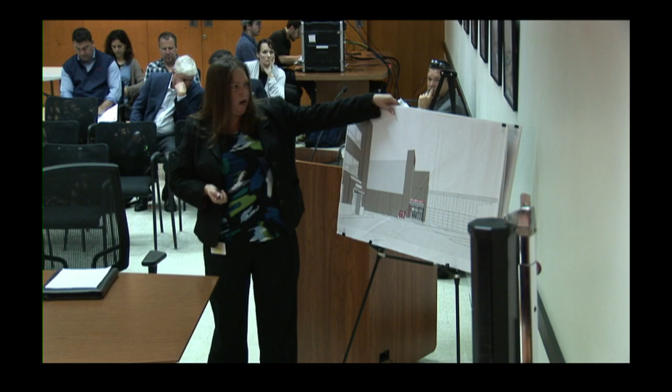Before we go to the specific repairs, just to keep the actions separate: the discontinuance is essentially 712 feet, for which the appraisal is pending. Any questions or comments on the discontinuance?

No. All right, Amy or Todd? No, we're good. All right, members of the public? All right, I'll entertain a motion on the discontinuance.

I'll make a motion to approve the petition by the trustees of Boston University, the discontinuance of any and all rights to travel the public may have had within a portion of Babcock Street, as read into the record by the chair and as shown on a set of plans entitled City of Boston Public Works Department, Engineering Division, Discontinuance Plan, Babcock Street, Brighton, one sheet dated June 2019. Second. All in favor? Aye. So moved.

Moving on to our next item, a petition by the trustees of Boston University for the making of specific repairs within the following public ways in Brighton, consisting of curb, sidewalk, and pedestrian ramp reconstruction, as well as new and relocated specialty pavement, street trees, and storm drain infrastructure. The locations are Babcock Street on its easterly side, at address number 285, between Ashford Street and Gardner Street, and Ashford Street on its northerly side west of Babcock Street, generally at number 300 Babcock Street.

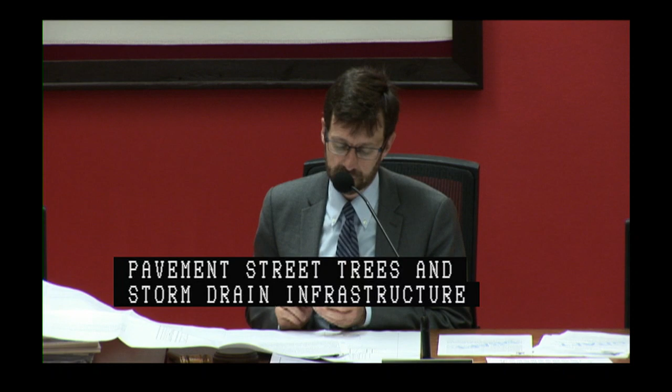This was new business on June 6, 2019, as shown on a set of plans entitled City of Boston Public Works Department, Engineering Division, Specific Repairs Plan, Ashford Street, 285 Babcock Street, Allston, Brighton, 4 sheets dated May 2019. Chelsea Christensen from Nitsch Engineering on behalf of Boston University.

The specific repairs we're proposing for Babcock Street are consistent with the improvements done across the street associated with New Balance Field. The proposed streetscape includes a 10 to 19-foot concrete sidewalk with a 1.5-foot porous strip along the back of the curb.

We are also proposing the removal of 4 existing trees, which currently land in the middle of the sidewalk, and moving 6 new trees to the back of the curb. The proposed tree pits are 4 by 6 feet. And that is the extent of the repairs.

Have you had any tree hearing on those removals? We've completed our tree hearing. Have we gotten to that approved yet? Yes, we have, and it's behind us. So it was approved, and it's been paid for, so we're set to go.

I realize you just said this, Chelsea, but that is basically moving those trees from the middle of the sidewalk, bringing them to the curb, and putting them in 4x6 tree pits. Yes, they're in the middle of the sidewalk right now because that's where the curb was. So, appreciate the change.

Did we find out anything on the construction management plan, where we are with that? It was submitted a while ago, and I hadn't heard back on comments relative to reconstruction, so I had a conversation with the contractor last Friday. It was pretty aggressive to cut off the sidewalk for the 4 months he was proposing, so we're working to tighten that up. Excellent, okay.

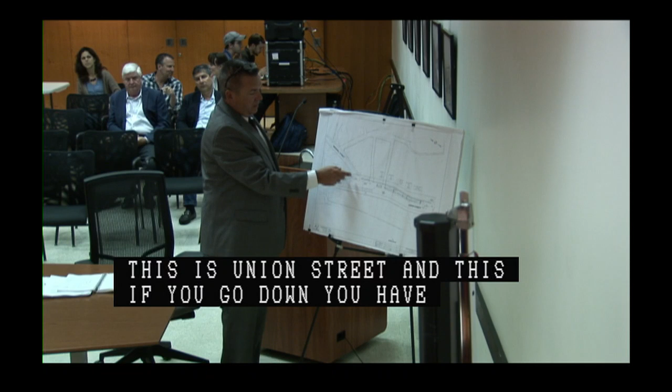But first, let me give you an overall view. This is Union Street, and the first restaurant here is One Tavern, next to the existing bank. As you go down, you've got the White Bull, Alexa, Sons of Boston, Hennessy's, and patios, and then between Marshall Street and Hanover Street, there's the Bell in Hand.

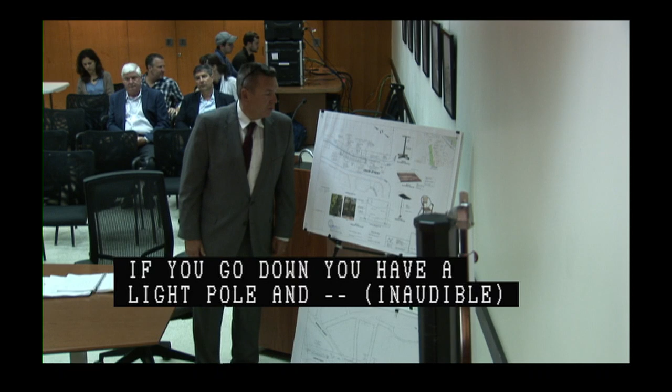The first application is for 1 Union Street. The cafe there will consist of 13 tables seating 26 people, and of that, two handicap seats are provided.

The design itself has been worked on closely with the Landmarks Commission. We're using the bollards for the back of the cafe that were installed as part of the city's recent Connect Historic Boston project. Along the front and sides, the cafe will be defined by the planters that were also part of that project, and a series of posts and chains, similar in nature to those across the street at the Holocaust Memorial. We did receive Landmarks approval.

We also met with Deputy Chief Joe McMahon about a month ago, myself and Amy Cording, and came to an agreement on safe and accessible fire egress. So we provide a minimum 20-foot clearance for emergency egress, fire, police, and other needs, as well as a 90-foot loading zone along Union Street.

There was a discussion at New Business regarding concerns with deliveries and daily operations. Since that time, the Union Street restaurant group, an unofficial name, but the proponents before you, have worked together and prepared a letter for the commission committing to working with their distributors to have deliveries before 8 a.m. I have a letter signed by each applicant, along with letters and emails from distributors promising to meet that 8 a.m. delivery time. That should ease a lot of the concerns and burdens on Union Street.

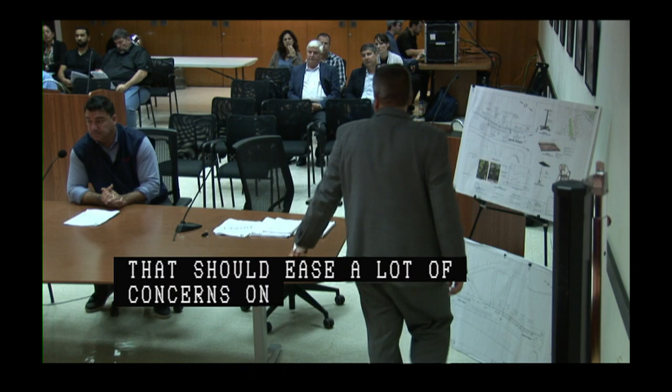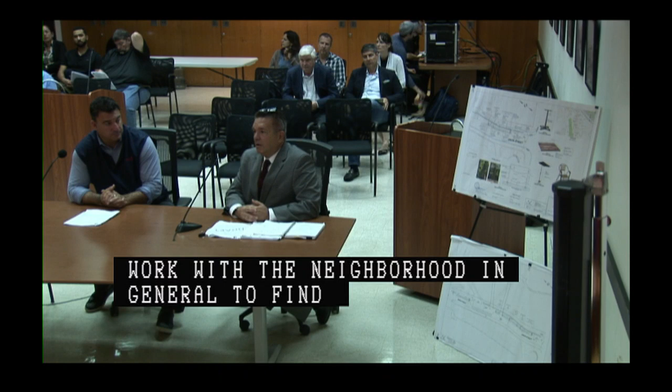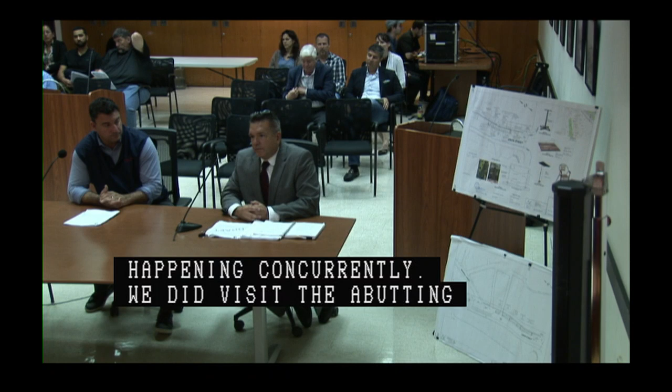In regards to accessible handicap parking, Amy Cording and I met with the Disabilities Commission earlier this week, Tuesday, on site. It's my understanding the city is going to work with the neighborhood in general to find handicap parking in this area, since not only is this project happening, but a number of other projects are happening concurrently. We visited the abutting garage on Hanover Street, parcel 7, and within that garage, at the first accessible parking level, there are 13 handicap spaces available. So there is parking available in the city, it just may not be known to the users. That's my presentation.

As you mentioned, John, there were a number of issues we discussed during new business: public safety concerns, operational concerns, accessibility issues, and serving across the right-of-way. On the public safety side, from your conversations with the fire department, this preserves an accessible path of travel.

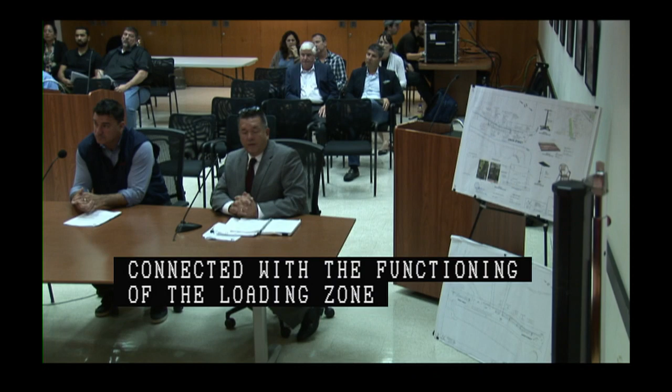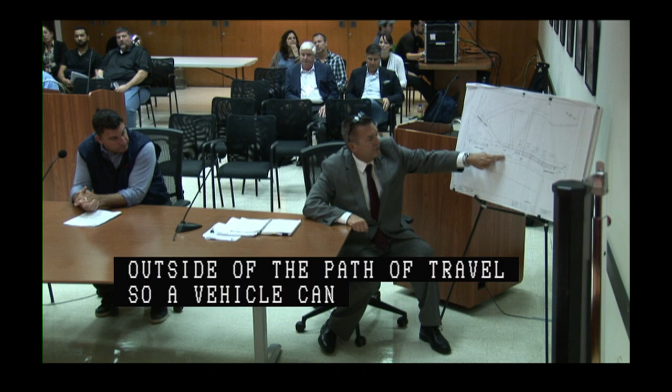Yeah, they're provided a 20-foot path of travel, which is their requirement for emergency vehicles. The loading zone is outside that path of travel. So a vehicle can come through here and out, and this is the loading zone here, about the middle of the block. We preserve the 20-foot path of travel around the loading zone, so it's not double duty as loading and fire lane.

Great. And essentially what's covered in this letter is the operations specific to each of these restaurateurs, committing that you can do all of your loading prior to 8 a.m. together within that zone. Right, so many of these restaurants share the same distributors, so there's an opportunity for them to all work together and collaborate, which will also significantly reduce the number of deliveries happening on the street today.

And there are 2 restaurants that are not part of this, is that right? Or how many? Yes, there are 2 restaurants that fall in this area here: Union Oyster House is one, and the other restaurant, Salsa.

And they were invited to join this, but they chose not to. Part of it, we want to make sure the loading can actually be confined for all restaurants within that zone to allow for the deliveries. And I'm sure my clients will welcome coordinating these deliveries with them as well.

As I stated previously, when we went through the Connect Historic Boston process, we worked extensively with the businesses here. One of the concerns was the loading. Obviously, it's not advantageous for the businesses to be receiving deliveries during working hours of operation. They want it before, so when patrons are in there, they're not getting deliveries during that time.

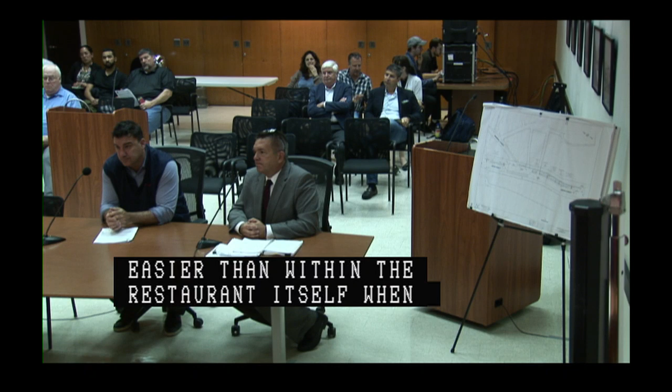Other questions or comments? No. All right, Amy or Todd? All right, members of the public?

Okay, so there are two pieces here. Obviously this, your ultimate sidewalk licenses, and Amy, correct if I'm wrong, it's contingent upon a license from the licensing board. Yeah, and that will govern the actual operations and the serving. They can have glass or plastic, that kind of stuff, will all come through the licensing board.

Great, so I think there are two things we just want to make this contingent on. Obviously, it's contingent upon the licensing board's approval. The second, I just want to take a chance to make sure that we sort of reviewed the operations plan to make sure that it actually can work for the businesses and work from a public safety perspective. Okay.

All right, I'll entertain a motion on this item, contingent again on both approval of the licensing board and our final review of the operational plan. I'll make a motion to approve the petition by Mr. Jeff Baird for the granting of sidewalk cafe license for seasonal outdoor seating within Union Street, Boston proper, as read into the record by the chair and as shown on a set of plans entitled City of Boston Public Works Department, Engineering Division Outdoor Cafe License Plan, White Bull Tavern, 1 Union Street, Boston, one sheet dated March 2019. Second. All in favor? Aye.

Moving on to our next item, a petition by Mr. Jeff Baird for the granting of a sidewalk cafe license for seasonal outdoor seating within Union Street, a public way in Boston proper, located on its easterly side at address number 15, generally north of North Street, consisting of seating for 8 persons and approximately 139 square feet within the public way. This was new business on June 6, 2019, as shown on a plan entitled City of Boston Public Works Department, Engineering Division, Outdoor Cafe License Plan, Blackstone Grill, 15 Union Street, Boston, one sheet dated March 2019.

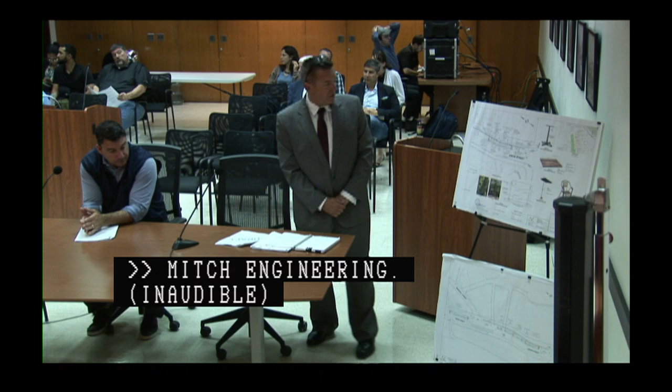Good morning, John Schmidt, Nitsch Engineering. With me is Jeff Baird, who also owns the restaurant abutting next to the White Bull. This is the Blackstone Grill. Similar cafe, similar materials, it's a little bit smaller. It's 8 seats with 1 handicap space.

And I assume everything we talked about in the previous item is... Yes, this conversation from the first petition will carry through all 6. All right, any questions or comments on the Blackstone Grill? Amy or Todd, all set? Members of the public? All right.

I'll entertain a motion on this item, again, contingent on the same two things, the licensing board's final approval and our review of the operations plan. I make a motion to approve a petition by Mr. Jeff Baird for the granting of a sidewalk cafe license for seasonal outdoor seating within Union Street, public way, Boston proper, located on its easterly side at address number 15, generally north of North Street, and consisting of seating for 8 persons and approximately 139 square feet within the public way, as shown on a plan entitled City of Boston Public Works Department, Engineering Division, Outdoor Cafe License Plan, Blackstone Grill, 15 Union Street, Boston, one sheet dated March 2019. Second. All in favor? Aye.

Moving on to our next item, a petition by Sons of Boston for the granting of a sidewalk cafe license for seasonal outdoor seating within Union Street, a public way in Boston proper, located on its easterly side at address number 19, generally between North Street and Salt Lane, and consisting of seating for 20 persons and approximately 308 square feet within the public way. This was new business on June 6th, 2019, as shown on a plan entitled City of Boston Public Works Department, Engineering Division, Outdoor Cafe License Plan, Sons of Boston, 19 Union Street, Boston, one sheet dated March 2019.

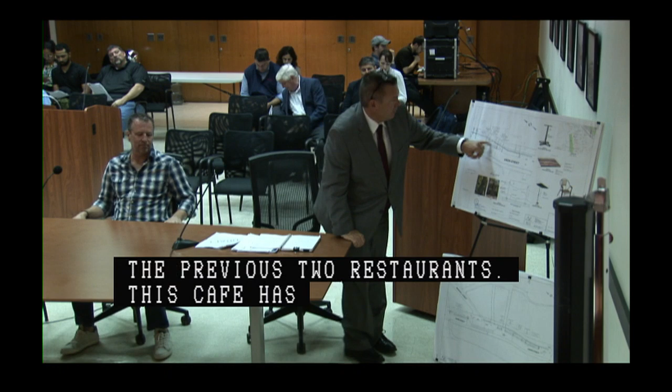Dave O'Connor from Sons of Boston and John Schmidt with Nitsch Engineering. This is the 3rd restaurant of the 6 applicants before you, and they follow the same procedures and requirements of the previous 2 restaurants. This cafe has 20 seats and 10 tables, 20 seats, and one handicap space. Again, the materials and arguments are the same as the original, first application.

Any questions or comments on the Sons of Boston petition? Amy or Todd, all set? Members of the public? All right.

I'll entertain a motion on this item, again, contingent upon both final approval from the licensing board and our review of the operations plan. Make a motion to approve the petition by Sons of Boston for the granting of a sidewalk cafe license for seasonal outdoor seating within Union Street, as read in the record by the chair, as shown on a set of plans entitled City of Boston Public Works Department, Engineering Division, Outdoor Cafe License Plan, Sons of Boston, 19 Union Street, Boston, one sheet dated March 2019.

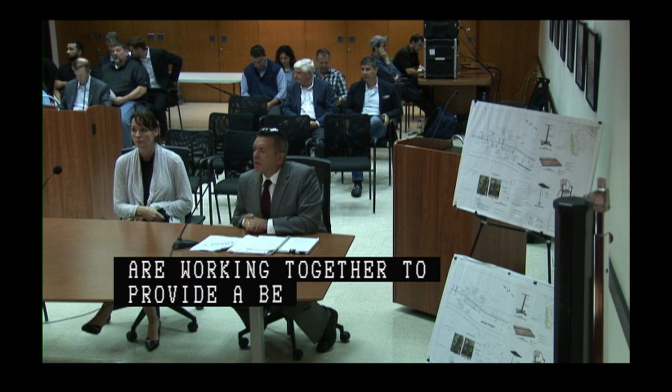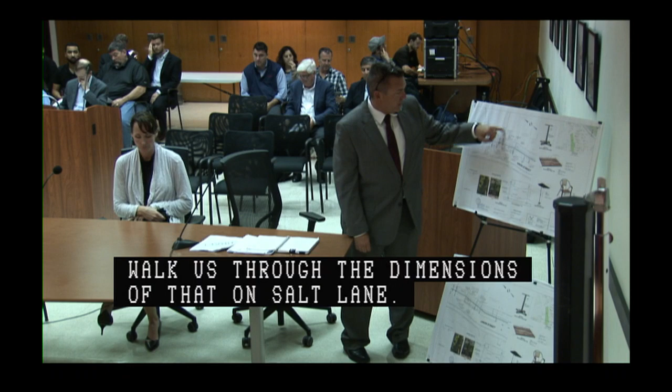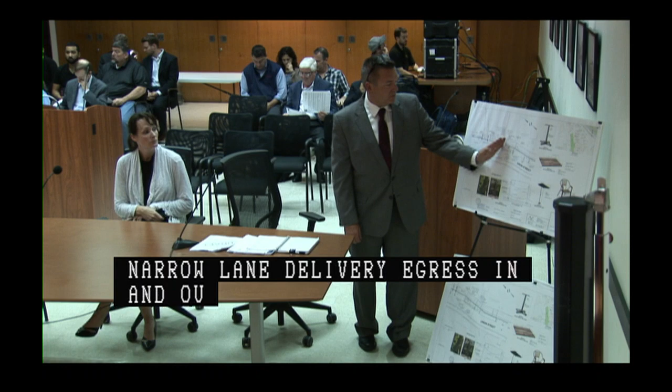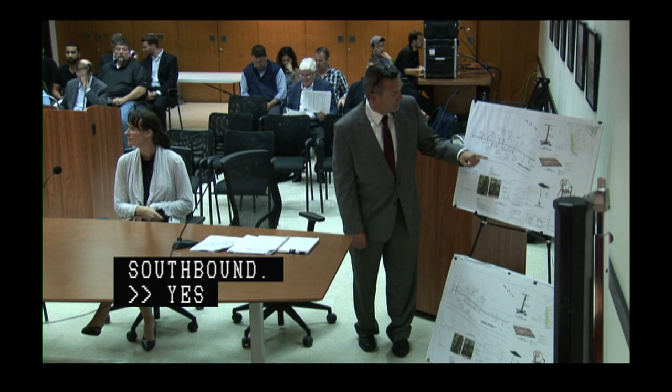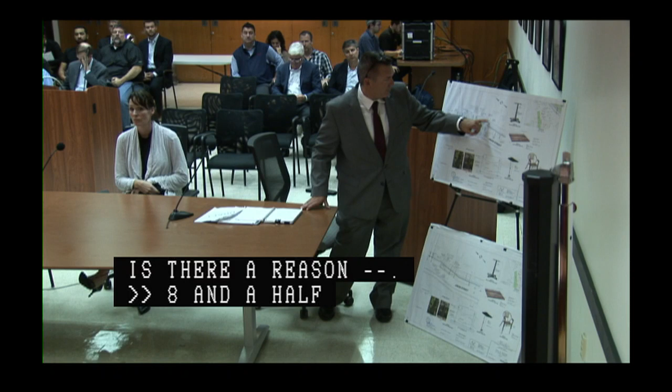Other questions or comments? It seems to perhaps bow in a little bit with the actual dimension of this cafe, is there a reason for that? This cafe comes out 8.5 feet on the sidewalk side. It's 11.6 feet from the building space to the bollards. Oh, you're just running it around the bollard. That's what it is. Got it, you good? Yep, understood.

Okay, Amy or Todd, we're good. All right, members of the public? All right, I'll entertain a motion on this item.

Make a motion to approve a petition by Ms. Noelle Summers for the granting of a sidewalk cafe license for seasonal outdoor seating within Union Street, Public Way, Boston proper, located on its easterly side at address number 25, generally south of Salt Lane, and consisting of seating for 18 persons and approximately 283 square feet within the public way, as shown on a plan entitled City of Boston Public Works Department, Engineering Division, Outdoor Cafe License Plan, Hennessy's 25 Union Street, Boston, one sheet dated March 2019.

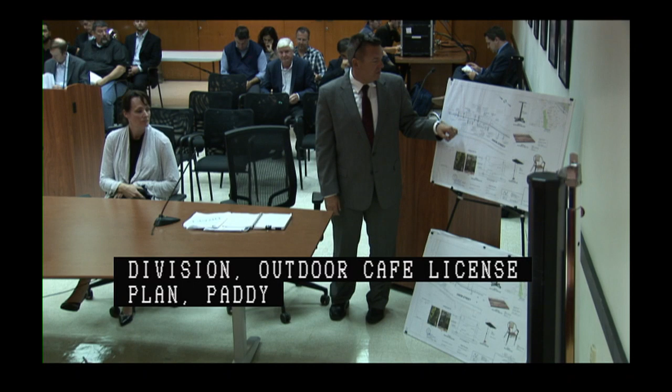This cafe is located right here, just west of Salt Lane. 4 tables, 8 seats, 1 handicap space, and as we said, the traffic movements exiting Salt Lane are improved because the path of travel is clearer here with better turning movements. The proponent is maintaining the same materials and design components as the previous applicants.

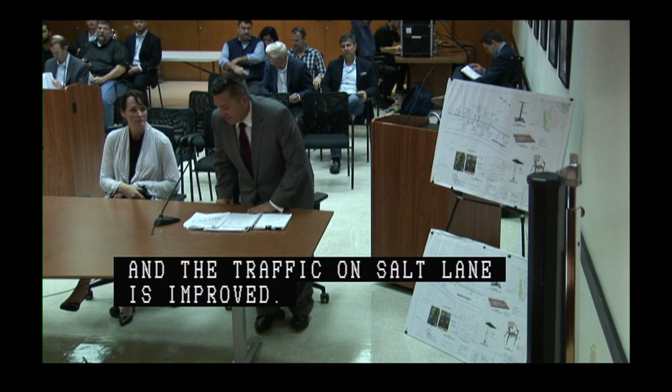Is there a reason, and would we want to look at any other vertical device offset from the planter towards Salt Lane, like a flex post or something? Oh, I'm sorry, yes. Every applicant will have, as required by the City of Boston Tactical Public Realm Guidelines, a wheel stop and a reflector, on the side of traffic, so you'll see it here, and here, and down.

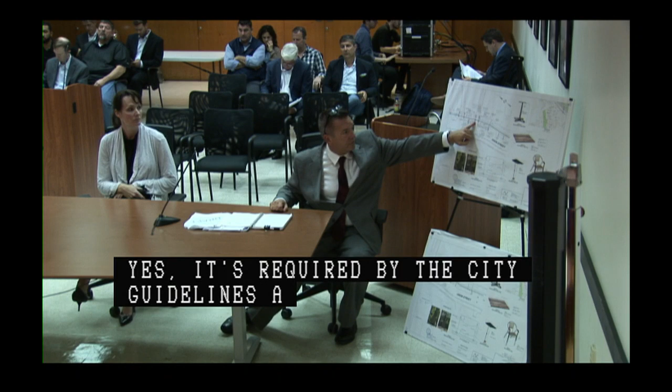Other questions or comments on this one? Amy or Todd? Members of the public? All right, I'll entertain a motion on this item.

Make a motion to approve the petition by Ms. Noel Summers for the granting of a sidewalk cafe license for seasonal outdoor seating within Union Street, as read into the record by the chair, as shown on a set of plans entitled City of Boston Public Works Department Engineering Division Outdoor Cafe License Plan, Paddy O's, 33 Union Street, Boston, one sheet dated March 2019. Second. All in favor? Aye. So moved. Thank you.

Moving on to our next item, a petition by Old Colony Corp. for the granting of a sidewalk cafe license for seasonal outdoor seating within Union Street, a public way in Boston proper, located on its easterly side at address number 45 between Hanover Street and Marshall Street, consisting of seating for 48 persons and approximately 733 square feet within the public way.

This was new business on June 6, 2019. This is as shown on a plan entitled City of Boston Public Works Department, Engineering Division, Outdoor Cafe License Plan, Bell in Hand Tavern, 45 Union Street, Boston, one sheet dated March 2019.

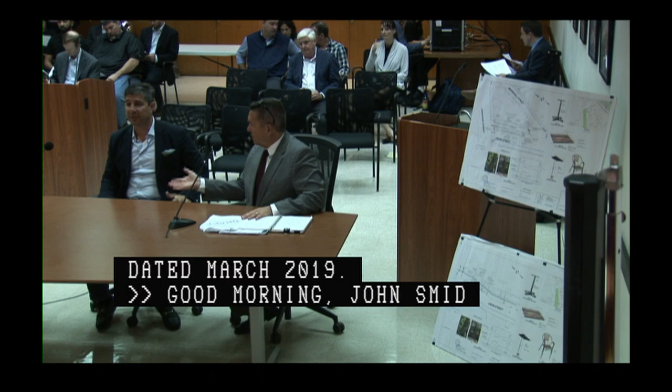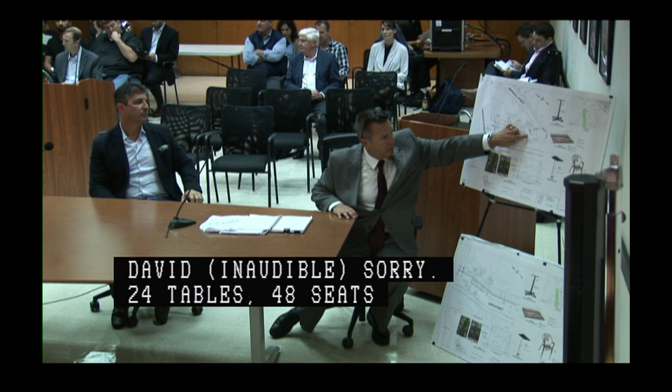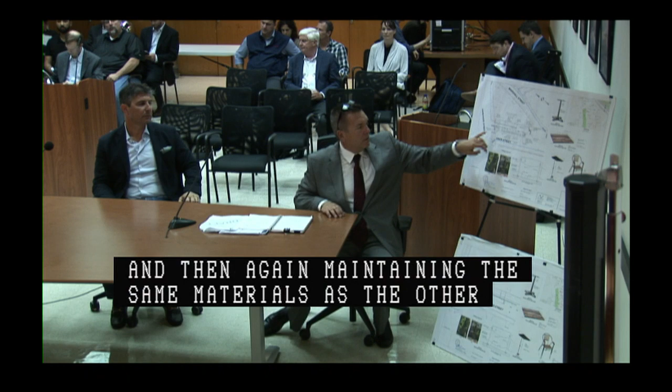Good morning, John Schmidt with Nitsch Engineering, and with me is Adam Kessler, who manages the Bell in Hand Tavern. This cafe will consist of 24 tables, 48 seats, 3 accessible seats. It's pulled back from the intersection a little bit, and we'll have tactical protection, the bollard and curb stop. Again, it's maintaining the same materials as the other cafes, which is the planters, the railing similar to the Holocaust Memorial, and the bollards for the back of the cafe.

Where Union meets Hanover, is that flush? That's great, yeah. Okay. All right, we just want to make sure that we're preserving that path of travel. Yeah.

Other questions or comments on this item? Amy or Todd? All right. Members of the public? All right.

I'll entertain a motion on this item, and again, as with all the others in this set, it's contingent upon final approval of the licensing board and contingent upon our review of the operations plan. I appreciate the fact that you are all coming with a proposal aimed at strengthening the vitality of Union Street. As we get feedback, as this gets deployed, we'd love to maintain a continued line of communication with you for any adjustments that might be needed. Absolutely.

All right, thank you. I make a motion to approve a petition by Old Colony Corp. for the granting of a sidewalk cafe license for seasonal outdoor seating within Union Street Public Way, Boston proper, located on its easterly side at address number 45 between Hanover Street and Marshall Street, consisting of seating for 48 persons and approximately 733 square feet within the public way, as shown on a plan entitled City of Boston Public Works Department Engineering Division Outdoor Cafe License Plan, Bell in Hand Tavern, 45 Union Street, Boston, one sheet dated March 2019.

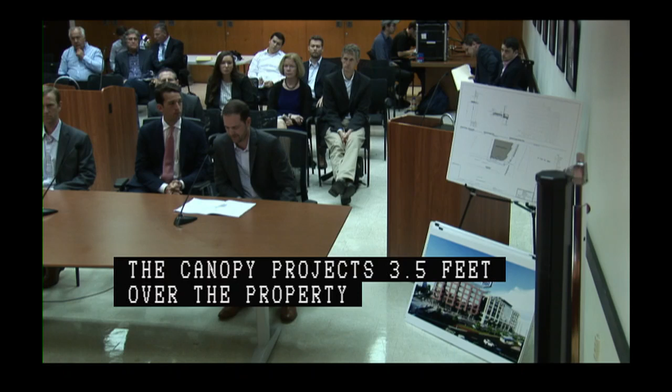Our first action is a projection license over Deerfield Street. As Alex mentioned, it's over the office entry for the Commonwealth building. The canopy projects 3.5 feet over the property line, which is significantly less than two-thirds of the proposed sidewalk, which is 16.2 feet wide from the face of the building to the property line. The canopy is just under 12 feet above grade and will be internally drained as well as heat traced.

Before I turn it over, Kyle's going to walk through some of the sidewalk improvements and specific repairs. I want to note that we've had extensive coordination with street lighting, parks, BWSC, we've met with accessibility, we've met with BTD recently, signed the CMP, and our TAPA is currently under review. With that, I'll turn it over to Kyle to walk through the specific repairs for Deerfield, Commonwealth, and Beacon, and go into more detail on materials.

I'm Kyle Zick with Kyle Zick Landscape Architecture. The streetscape proposed in front of the Commonwealth building changes the sidewalk and improves it quite a bit. It's already a busy sidewalk with the amount of foot traffic we have in that area, and we're anticipating that will increase.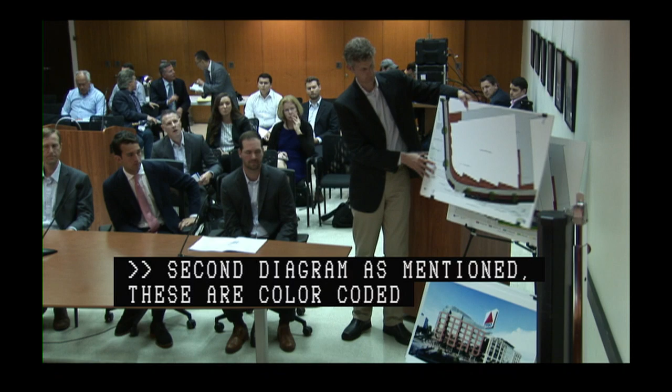I have a question on this. I imagine you're looking at a consistent design on Comm Ave for this building and the Beacon building. Is there a furnishing zone design standard we're using more broadly within Kenmore Square that this should match, or further up the BU campus that we should be matching here? Maybe—how does this connect with the adjacent areas?

So the palette of materials used in Kenmore Square now is generally a blend of red brick. Furnishings vary from property to property, but we're using a red brick complementary to the rest of the square. We're not changing the crosswalk materials. There's also a brick material on the building, so there's coordination there, and between the Commonwealth building and the future application for the Beacon building, there's continuity in terms of materials.

It will be the same streetscape design from Beacon to Commonwealth, the same brick material and concrete accessible sidewalk that you see in front of Miles Standish Hall is the same palette we're using. We will use a wood benching street furnishing program versus the granite in front of Miles Standish Hall, but the same palette of materials—similar to what was already done to the east, with the exception of the street furniture. Yes, yes.

We have worked with BTD to coordinate a raised buffered bike lane through the site that will work in front of Miles Standish Hall, as well as the future development next to us to the west in Kenmore. That's going to be important because we have a meeting today with the other developer about the proposed traffic scenario with them, which is very challenging.

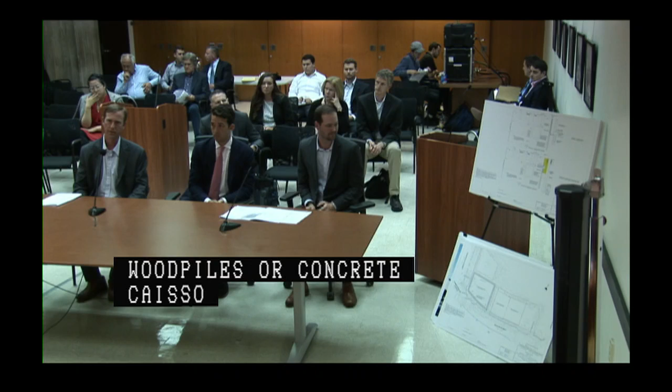In order to construct our new building, we're going to need to excavate about a 30-foot deep hole, for which we're going to install a concrete slurry wall all around the site. But before we can install that slurry wall, we need to remove the foundations that are there from the former building, which leads us to needing a temporary excavation support system before we can install our permanent excavation support system, the slurry wall.

The sections show at the top step one, which is the installation of a soldier pile wall about 4 feet off the property line, to allow us to remove the existing foundations in limited sections. Once those are out of the way, the excavation would be backfilled up to grade. Concrete guide walls would be installed for the slurry wall, and then the slurry wall would be constructed approximately from the street grade.

We've coordinated with Boston Groundwater Trust. They're aware of the project. We've agreed to monitor groundwater levels in the vicinity of the site during construction, before and after, and will be performing vibration monitoring to monitor that water line as well as other structures around the site.

In terms of organic soils, I know that's commonly a concern. In terms of odors, there's only a thin veneer of organics here on the site, so we don't anticipate odors from organics being an issue. Happy to answer any questions.

So with the organics, historically in this area and up in the Fenway it's been an issue. Is there mitigation on the project for the odor? Yes, the contractor will be required to load the soils directly into trucks, not to stockpile. Is there going to be use of a foam? Yes, they'll be spraying it, and there'll be odor socks as well.

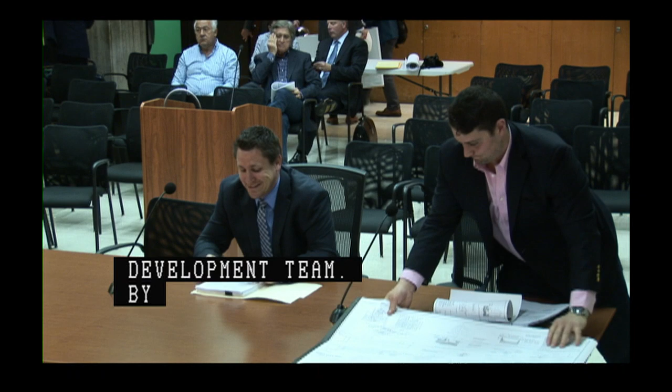Good morning, Mr. Chair, Commissioners. My name is Attorney Matt Eckel with Drago Toscano on behalf of 214 Market Street. With me today is Jacob Simmons on behalf of the development team. By way of brief background, 214 Market Street was a mixed-use development project that went through the BPDA small project review process and was approved by that board as well as the Zoning Board of Appeals. It was approved as one retail space with 29 condominium units and 32 parking spaces.

The specific repairs we are proposing are both on Market Street and Saybrook Street, because this project abuts both streets with frontage on Market Street. On Market Street specifically, we're proposing 3 new tree pits as well as 2 bike racks. To accommodate these, we're also proposing a 1-foot pedestrian easement, which will allow for a minimum of 5-foot plus clearance along Market Street to accommodate pedestrians.

Along Saybrook Street, we're proposing to close an existing 10.5-foot curb cut and replace it with a 20-foot curb cut. Originally we had proposed 24 feet, but in working with the BPDA, they recommended cutting it down to 20 feet. We'll also be seeking to relocate one existing utility pole to allow for that new 20-foot curb cut. With that, I'll pause and take any questions from the board.

Apologies, I'm just catching up to the presentation. No problem.

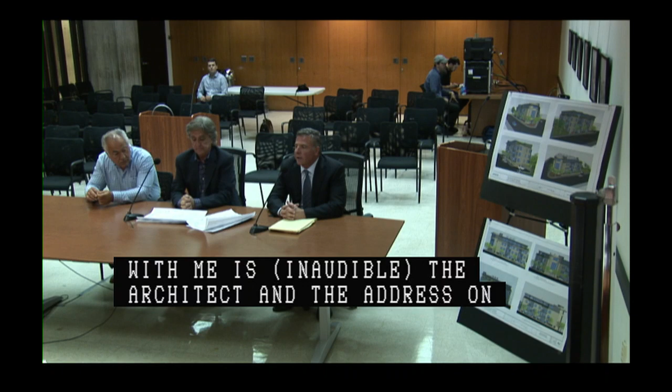It was an old gas station that's been left vacant for about 20 years on the corner of Belgrade and Beach Streets in West Roxbury. The project is 18 units, 2 bedroom, 2 bath, 33 parking spaces located underground. Total square footage is about 31,000 square feet. It went through both Article 80 small project review with the BPDA as well as Zoning Board of Appeal.

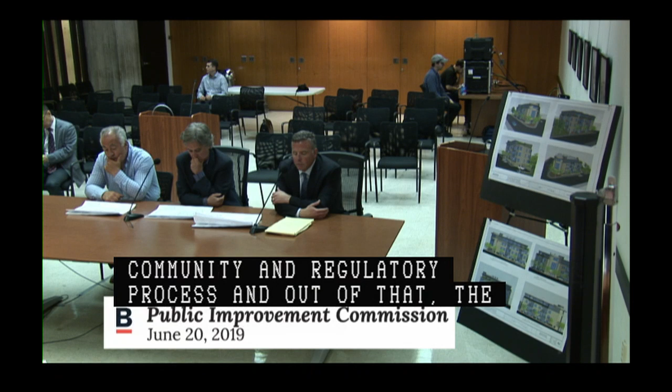This went through an extensive community and regulatory process, and out of that process the following specific repairs came about: new sidewalks and pedestrian ramps, changes to the curb line, closing two existing curb cuts on Beach Street and Belgrade and replacing them with a new curb cut on Beach Street for access to the underground garage, moving a light pole to the entrance of the parking garage, adding tree pits throughout, adding bike racks at the front, some on the side and also in the garage, planters along the back of the sidewalk, traffic signals, signs, stop and crosswalk signs, and utility connections.

All of the specific repairs which I just mentioned were done through community process, working with different city agencies. It's been a long process, and we appreciate the feedback we received because I think it really does make it a much better project. That being said, if there are any questions, Lucio Trabucco is here, he could answer any architectural questions, or if somebody representing a different department who has not already weighed in with their changes, please let us know, and we'll be happy to answer them.

You mentioned traffic signals, that's correct, Mr. Hesford? What are we doing there? Yeah, those conversations we had with the Transportation Department, they request traffic signals, and we have to coordinate with the traffic department on the type and location of those. So Mr. Hesford represents the traffic department on the PIC board, yes.

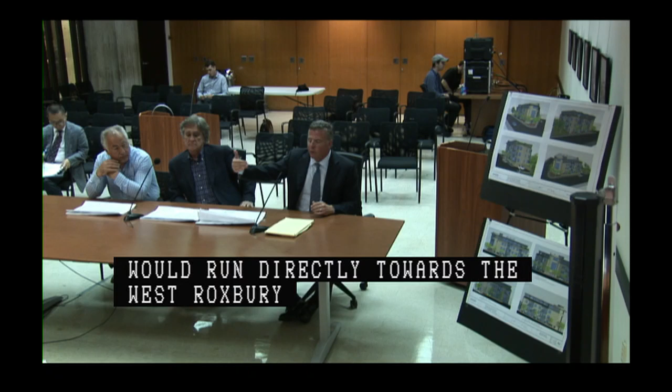There was some concern as you come down from, say, Roche Brothers - it's a triangular parcel, so Beach Street would run directly toward the West Roxbury Parkway, and Belgrade would go more toward Roslindale Square. Right there was some concern with traffic, that when people hit that, they don't stop their cars there, like a Hollywood stop. So that's bumped out a little bit there. There's a stop sign that'll be placed a little bit further into the street so they can see it. There's crosswalks for pedestrians, especially where Roche Brothers is close by, they wanted those linked.

So you're not installing a traffic signal? No, stop sign, traffic signs, I apologize. Because that's not a good intersection at all, very difficult, site visibility is an issue.

My biggest concern looking at this plan now, since I haven't seen it, is your main entrance is right at Belgrade and Beach Street, yet the crosswalk is down at Kenneth. The reason for that was, as we went with the abutters, there was a concern - we had the crosswalk right at that intersection close to the entrance to the building, but we had a lot of opposition from the immediate abutters for the location of that.

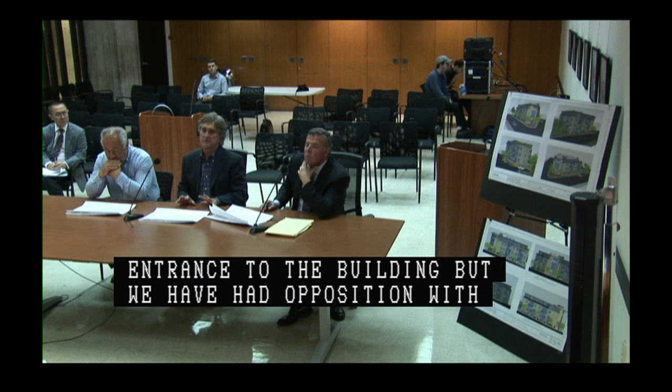What was the opposition? Well, the opposition was the concern that they would lose on-street parking, and they were really adamant about not using that as a crosswalk. So we got a sketch from BPDA to move it to Kenneth and Beech Street.

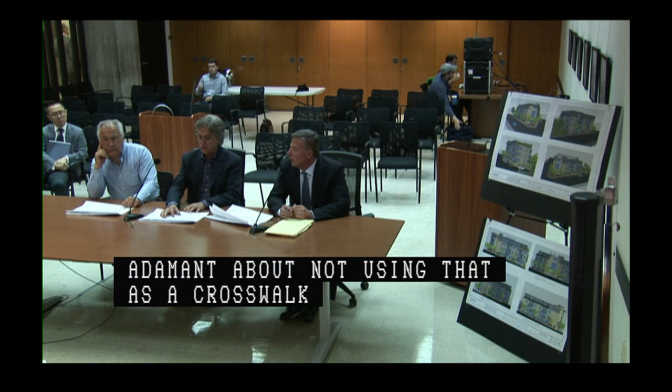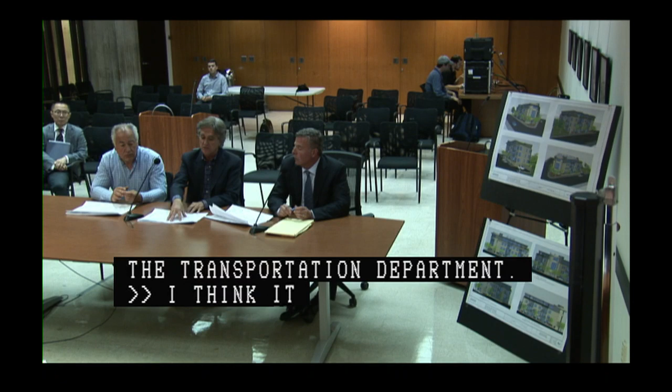So the BRA told you to move the crosswalk? They sent us a sketch. The only people that do that is the transportation department. I think the transportation department was involved with this project, they also attended the community meeting. The people living in your building are coming out the front door, and you expect them to walk 150 feet down the street to cross in the other direction.

I don't disagree, I'm just telling you what the conversation was. Your tenants, the people who will live in your building, are going to come to me saying they want a crosswalk there, that it's not safe. So are you going to write into your lease with them that there'll be no crosswalk at the intersection?

I'm just telling you the process, they were really adamant about that. And actually, I'm all about pedestrian safety, that's what I am. But your department was in every meeting with the abutters as well, I represent your department.

Who was that? I think it might have been Billy Conroy, from BTD. Yeah, I believe it was Mr. Hassford, it might have been, I know it wasn't Pat Hoey, but I'm thinking it was Billy. Again, I'm not disagreeing with your statement, I'm just saying that's the process for why it was located at Kenneth and Beech Street.

Yeah, that's right, we're now in public hearing. I think it's important to connect with BTD, because the desire line is going to go back up to Centre Street, people are going to be walking down Kenneth. And we have a major meeting tonight with the community about pedestrian safety in West Roxbury on Centre Street, that's what we had to begin with. Again, there was such opposition that...